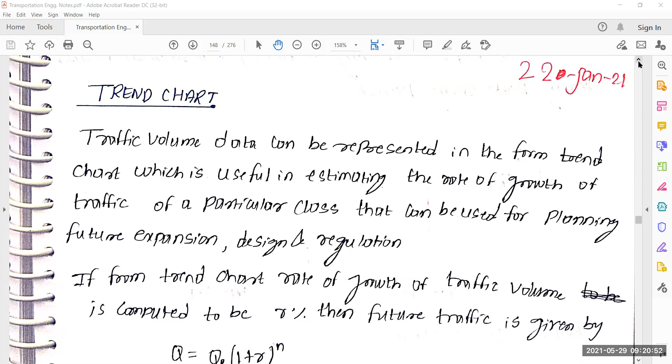In the previous class, I covered up to, I think, representation of traffic flow. So once again, we see what are the various methods by which we represent our traffic volume. So the first method is annual average daily traffic.

Annual average daily traffic is defined as the total number of vehicles throughout the year, and this vehicle count is done throughout the year for all the days. That means for 365 days, we count the total number of vehicles and we divide by 365, then we get annual average daily traffic. Okay, next one is annual average hourly traffic.

Annual average hourly traffic is defined as the total number of vehicles throughout the year by 365 into 24. This will give us a unit in vehicles per hour because it is annual average hourly traffic. Now next one is, I think,

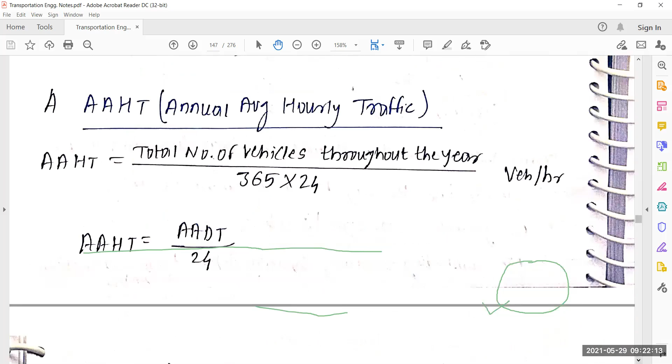annual average weekday traffic. So weekday means the days between Monday to Friday. So we do not count the weekend days for weekday traffic. That means for Saturday and Sunday, we do not count the number of vehicles that pass on these particular 2 days. So throughout the year, we do not consider the whole Saturday and Sunday for our traffic count.

So annual average weekday traffic is equal to total number of vehicles throughout weekdays by 260. 260 will come in that manner: there are 52 weeks in a year. 52 into 5. That means for the whole year, 52 Mondays will come, 52 Tuesdays will come, 52 Wednesdays will come, 52 Thursdays, and so on. So we multiply 52 by 5, then we get 260.

And also, annual average weekday traffic will come in the unit of vehicles per day. So annual average weekday traffic is greater than annual average daily traffic. Okay, now once

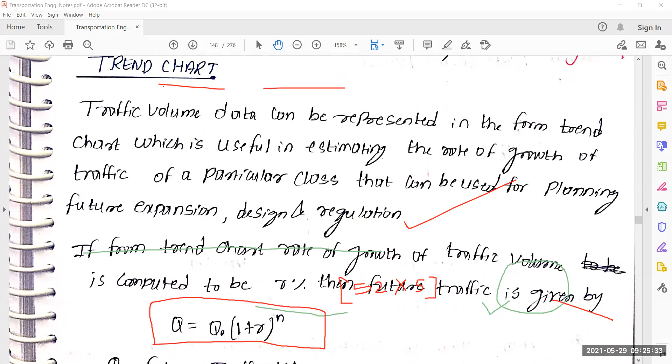Now next one, move further. Yeah, trend chart. Next one is trend chart. Traffic volume data can be represented in the form of a trend chart, which is useful in estimating the rate of growth of traffic of a particular class, that can be used for planning, future expansion, design, and regulation.

So it will be defined as: traffic volume data can be represented in the form of a trend chart, which is useful in estimating the rate of growth of traffic of a particular class, that can be used for planning, future expansion, design, and regulation.

That means the previous methods are mathematical methods by which we represent our traffic volume, but trend chart and many other methods which we discuss later are different types of representation of our traffic volume, and these representations are fully graphical representations, and all the points involved in trend charts are discussed.

Like, traffic volume data can be represented in the form of a trend chart, which is obvious, because our traffic volume data can be represented with the help of a trend chart. Also mathematical forms are available with us. So through the trend chart we estimate the rate of growth of traffic of a particular class. That means we find out how our traffic will grow, how this traffic will involve a particular class, and the rate of growth of our traffic.

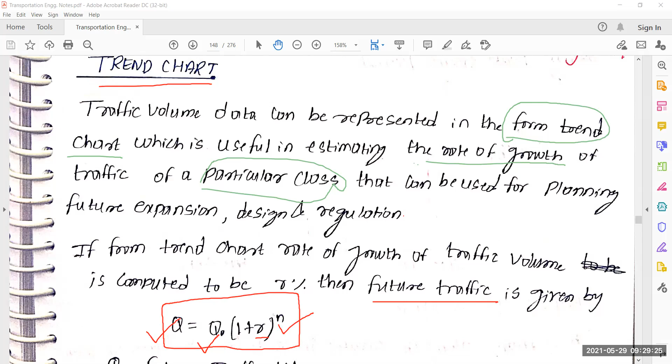Here we see, just wait, here Q = Q0(1 + r)^n, where Q is the future traffic volume, Q0 is the present traffic volume and n is the number of years. So Q is the future traffic volume, the year for which we require our future traffic. Q0 is the present traffic volume, that means the last known traffic volume, and n is the number of years after which traffic is required.

N is the number of years after which traffic is required, and r is the rate of growth, r is the percentage rate of growth.

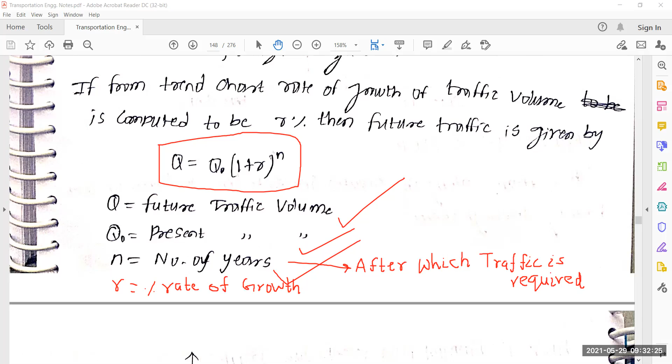Now, how will the trend chart be drawn? So just see, the trend chart is drawn as this. Just a bit, increase our y-axis. This is our y-axis and this one is our x-axis, and on the x-axis we plot our time in years, and on the y-axis we plot annual average daily traffic.

Annual average daily traffic. On the y-axis I plot annual average daily traffic, and on the x-axis we plot our time or years. Now, let us suppose we start with 2010, 2011, 2012, 2013, 2014, and so on.

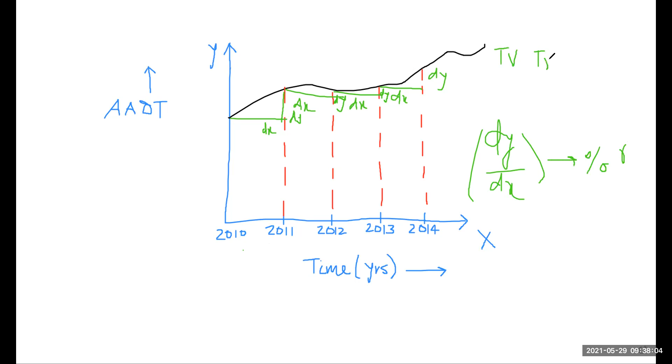So this is the traffic volume trend for the last 5 years. This is traffic volume, TV, traffic volume trend of last 5 years. And by knowing this traffic volume trend for the last years, we find out for next year also, and so on. So this is also a method, a graphical method for finding our traffic volume. Now move toward the next method or next representation. So just wait.

So this is our annual average daily traffic representation, which I already represent, annual average daily traffic 2010, 11, 12, and 13, and so on, which I already discussed. Now, the next graphical method for representation of traffic volume is known as variation chart. And how will variation chart be defined?

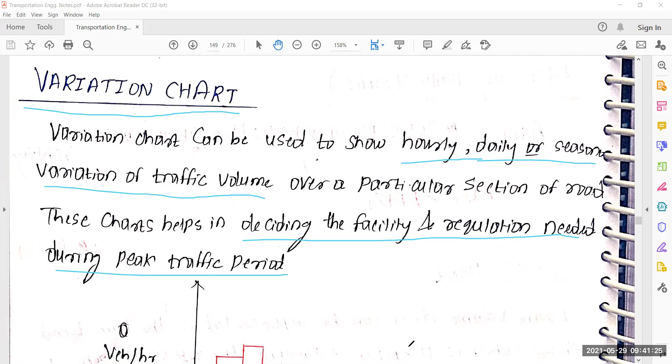Below, our variation chart is also shown. This is our variation chart. On y-axis, we have vehicle per hour, that means our traffic volume. Traffic volume is represented on y-axis, same as that of our trend chart. But in trend chart, we represent traffic volume in terms of annual average daily traffic. This is our traffic volume.

On y-axis, this is q value, and our q is represented in vehicle per hour. And on x-axis, we represent time, and time is in hour. So this is a variation chart for a particular day. Just see here, we start from 6 a.m. and end at 6 a.m. So this is the variation for our 24 hours.

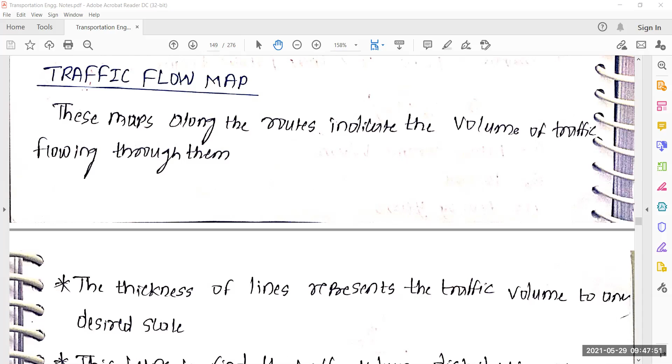This helps to find the traffic volume distribution along the existing road at a glance. That means the traffic flow map helps to find the traffic volume distribution along the existing road at a glance. That means how our traffic volume will be distributed on that road, we find through the traffic flow map.

Just I'll show you all the things. Just wait. Clear, all right. Okay,

Suppose we have a road network. Select a city like Chaibasa.

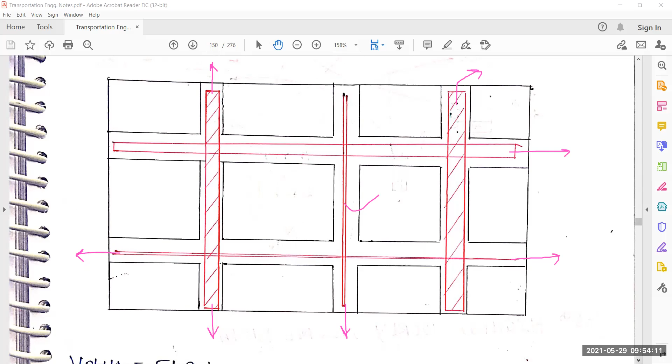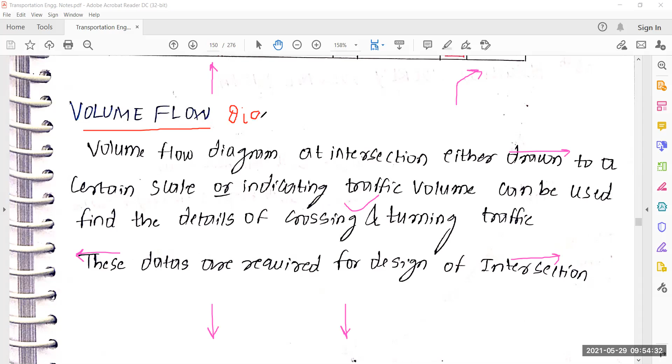Now, next method. Next one is traffic volume flow diagram at intersection. This diagram will help to decide our rotary design, which we discuss later.

So, volume flow diagram at intersection, either drawn to a certain scale or indicating traffic volume, can be used to find the details of crossing and turning traffic. So basically, the volume flow diagram is done at the intersection point to show how much traffic volume can cross our intersection or how many vehicles will turn at our intersection. These details are required for designing the intersection, which we will discuss later.